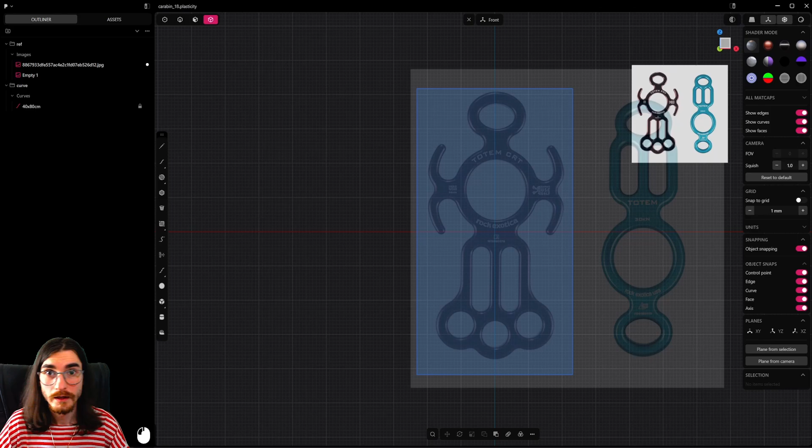Hello friends, today we're going to make this tricky little shape. Let's start from size - it's like 40 by 80 centimeters.

Let's start from the central one, make it like this. What's next? Good question.

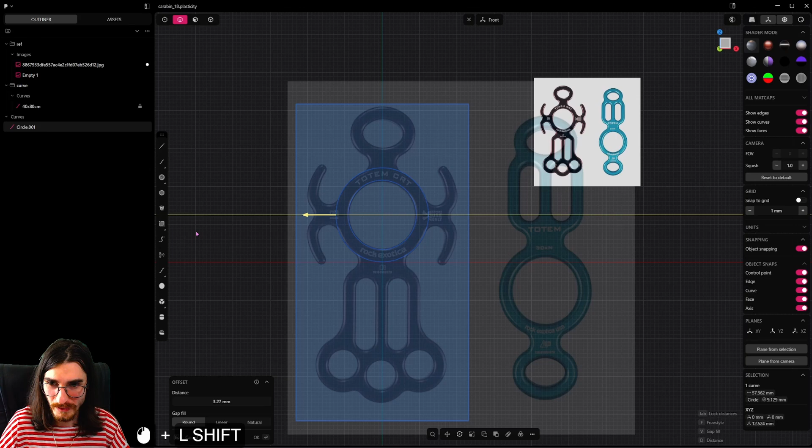Offset, of course. We are doing the offset and making it like this, this part here. Move it over here a little bit.

Yes, I think we should offset it first, and second we should move it. Shift D and move it to the center, somewhere here. Now we need this ellipse.

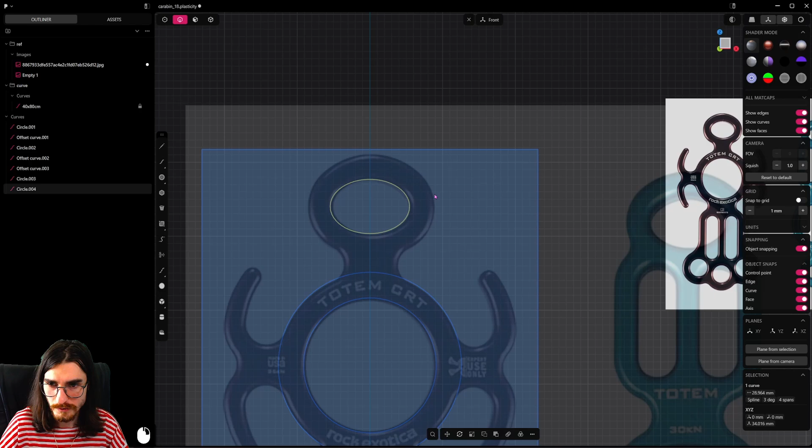The same offset here, and we need these tricksters here. Let's create one here.

This is going to be our first one, 2.794. Yeah, let's do another one here.

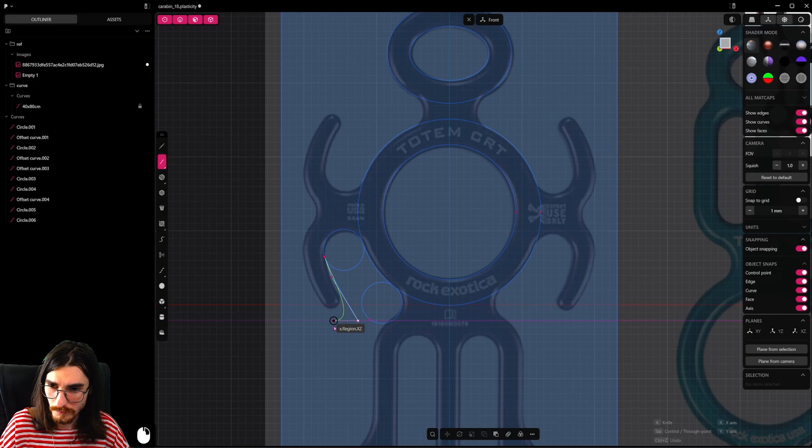Drop it like this. And these guys are going not in the same direction. Let me just show you a little - switch to control points. Good, and let me move this one here.

SV, put it here and make it smaller. Yeah, I think this one is 5 point blah blah blah. Okay, let's do it over here.

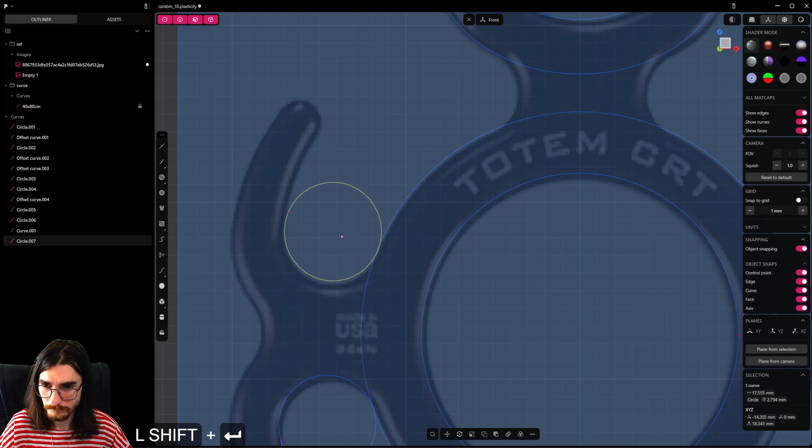F, dimension 5.588. Oh, so that's what's wrong.

GV, can I get it here and can I snap it? Yes, I can. And here is the same problem, I guess. Yes.

GV, let me snap it here, Y axis, and let's snap it to this thing. It should be a 3-point circle. Let's try 1, 2, and let's do a third one here.

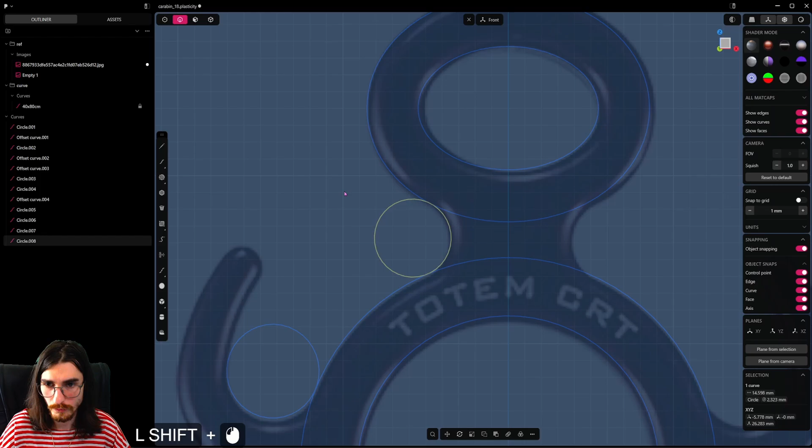Good, so what's next? You will ask me and I'll tell you. We are going to do this thing, make it something like 3 millimeters.

Perfect. I need to do it over here, and I need to do that on the center line over here. And now I can try - yes, I can do that.

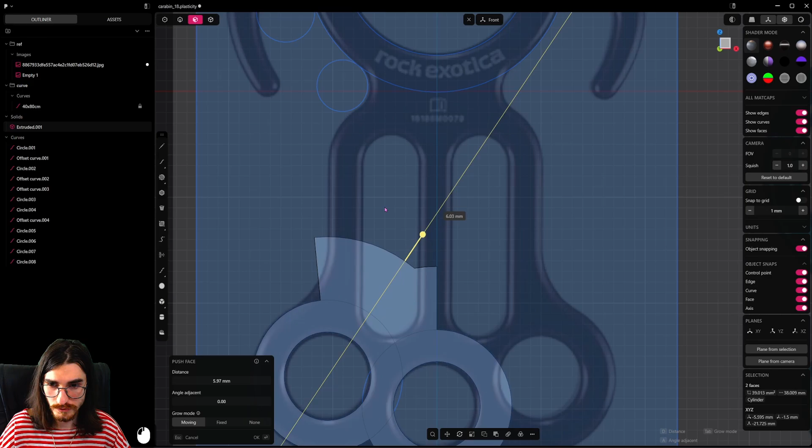Let me just rise it somewhere here, and let's do C, cut, apply X, and let's adjust it just a little bit, move it over here to match this.

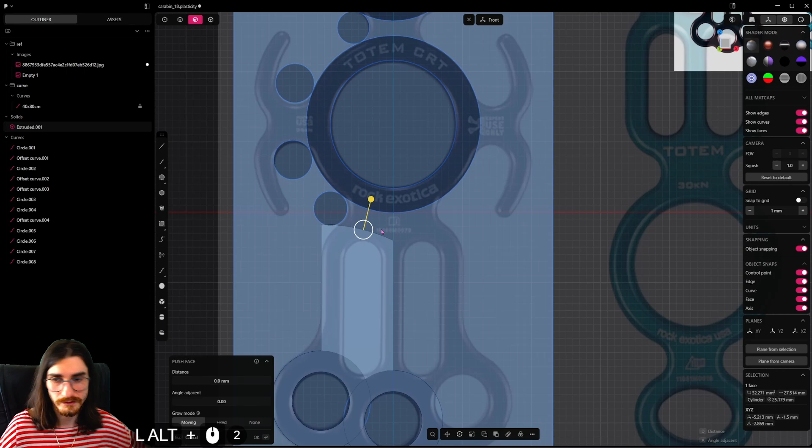Let's continue our journey over here. So I need this part and I need it to be flat. Let's do the same trick with this thing.

C, X, perfect. And let's drop it to the top, maybe like this. And I also need to drop some here, I think, yes, and drop it somewhere here.

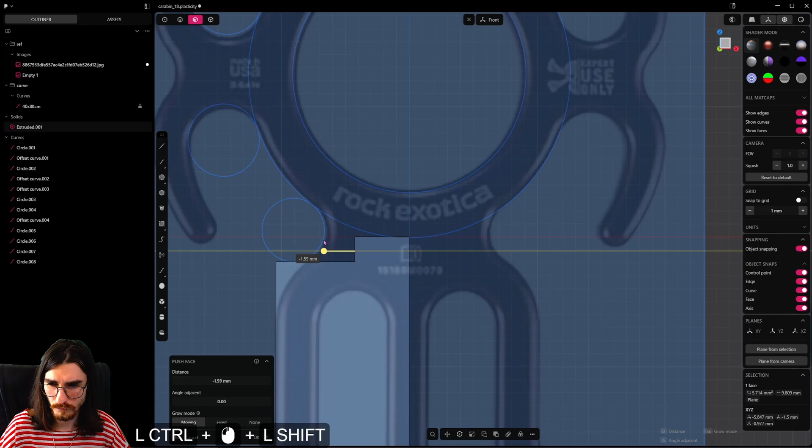I think somewhere over here. Make this one and match it. F, match face with this thing.

And I also want to match face with this bad boy. Yeah, let me just create this stuff here. And let me select this, and do F, match face, and select this.

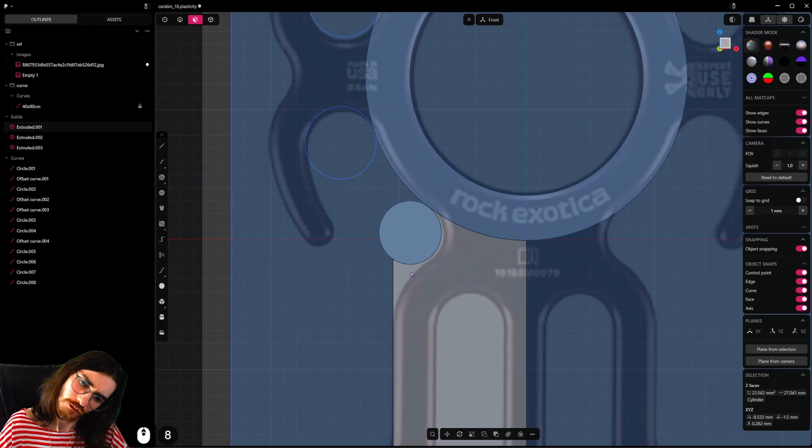The only thing I don't like is that it's made it with this. Can I just - yes I can. Perfect, perfection, love it. I think I can merge.

It's not a big deal here, it won't be a big mess if I do it. Okay, and let's do Alt X on this side, Q, merge it, and let's take this.

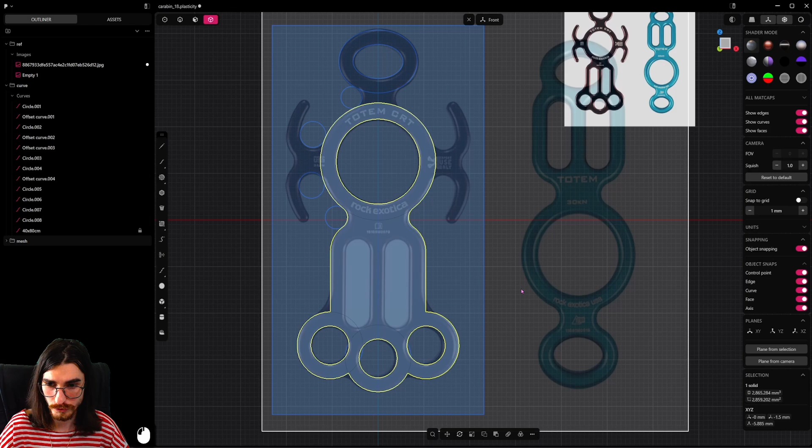I think definitely we should do extrude and extrude it here. Just Q, merge it, and let's also cut this one like that. C, boom boom, X, just to have this nice circle here.

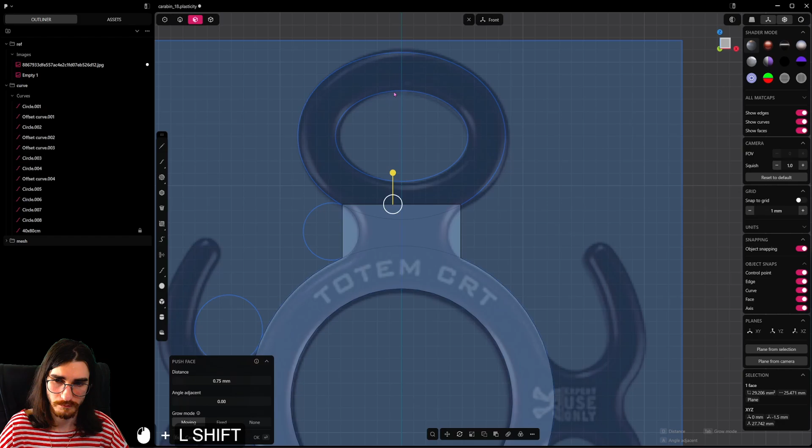Yep, I think something like this. Let's drop this guy on the same level, and this is our guide. We want to do this thing.

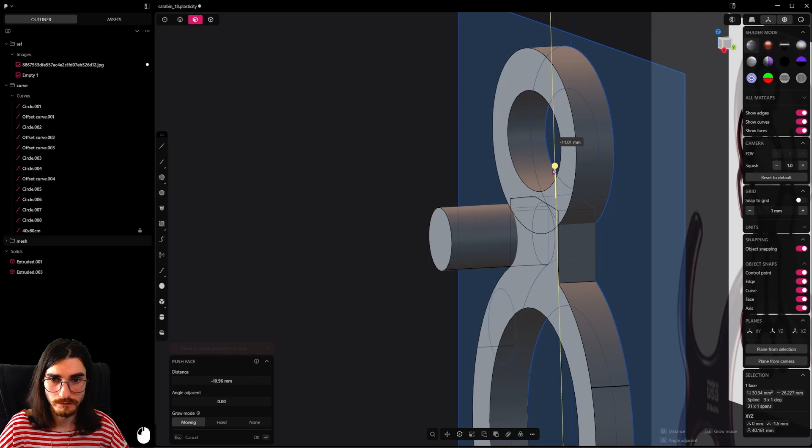Let me just drop it to the ground, Alt H, and let's F, match. What? What's wrong with that? Too much, I think - what's wrong with that?

It's just because, yeah, I need to cut it a little bit over here and here. Let's just Alt X it to this side, merge it, and now it should work.

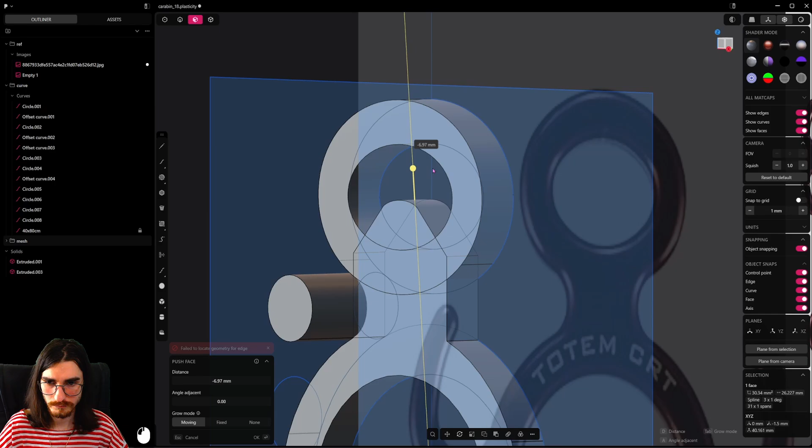F, match, and select it. No, for some reason it makes it too big. Not sure why. Okay, let's apply it, and let's just take this.

Now what - I can hide this guy, I can take this thing, I can do a C, cut, apply, and I need this for some reason, and I will delete this just like that.

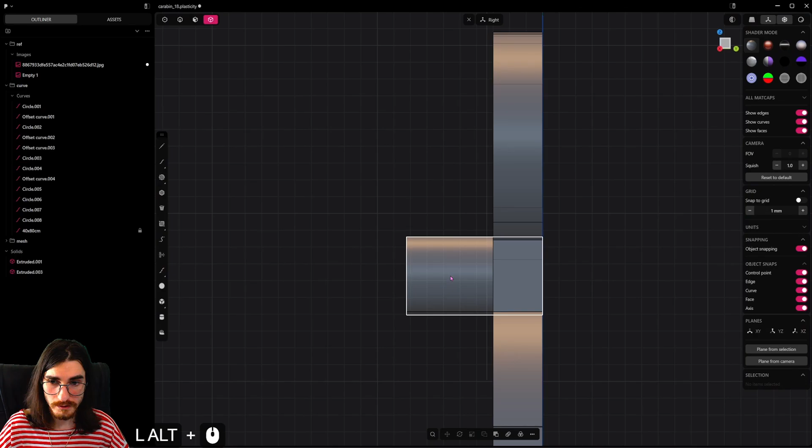Alt H, good. And now I can boolean it, or I can try to match face it. Why not? Let's try to match face.

Okay, Alt H, F, match face, and select this. Good, this one worked. Sometimes it doesn't work, it's not a big deal. We always have our booleans. If it doesn't work, boolean it. It will do the magic.

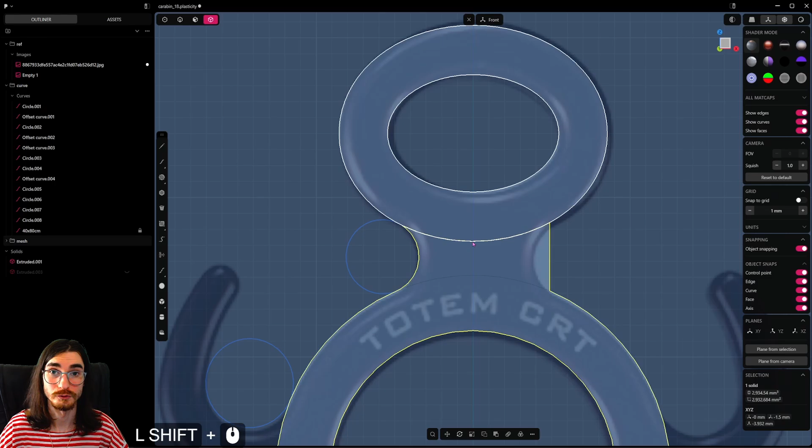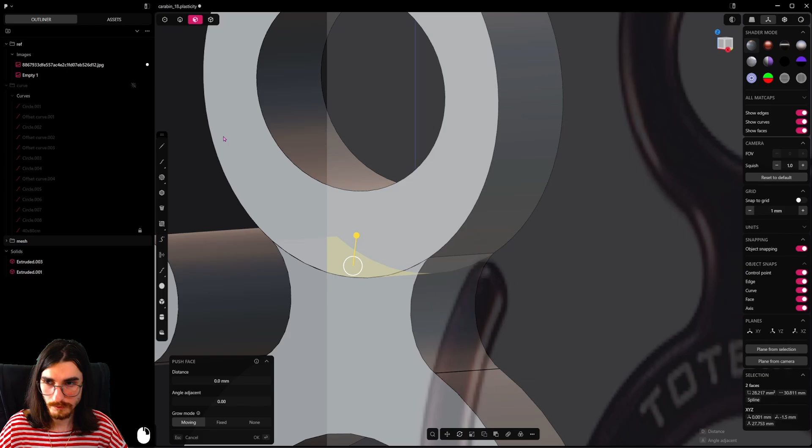Let's see, why can't I merge it. Let's do Alt, Q, merge it. Let me just quickly try something, move it over here. Let me do Alt H, F, match face, and drop it here. Maybe now it will work. Yes, okay, so sometimes it can just give you nuts.

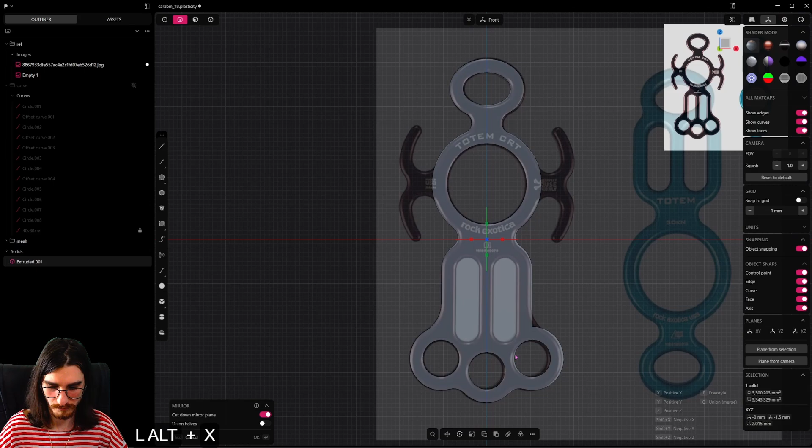So to finish this octopus, let's drive—I don't know, I think it's an octopus, it reminds me of an octopus. Let's just make this one like this. Yes, these guys should be something like this. Actually, I forgot, F, redundant topology.

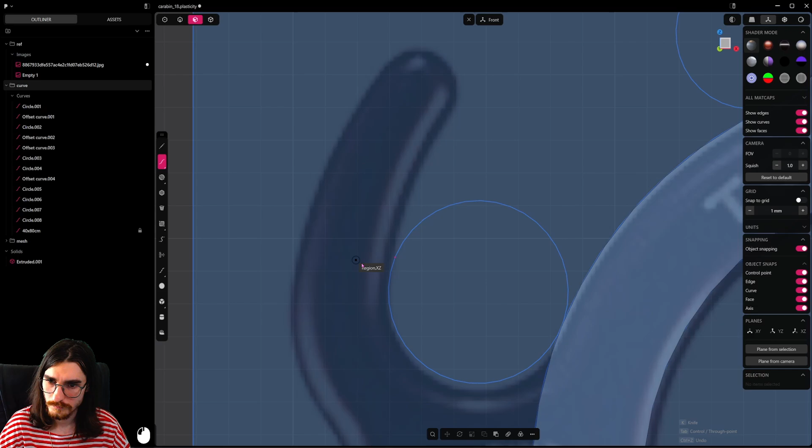Let's just drop it here, and let's do the same over here. Press E and extrude, that's pretty good. First thing first, let's cut this guy down. See, cut it, let's make it a little bit bigger, like this. I need it somewhere here. Yes, yes, something like this should work.

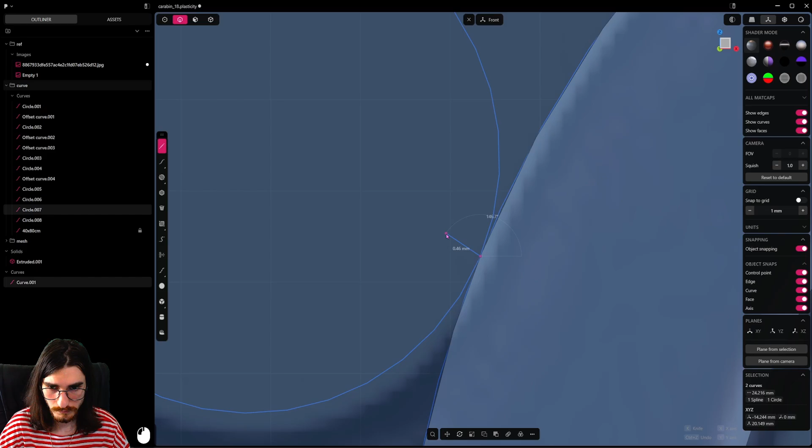Okay, let me select it, Shift C. Good. And let's do the same thing here to cut it like this. Shift C. Good. X. Join it. Okay, let's just make it like this.

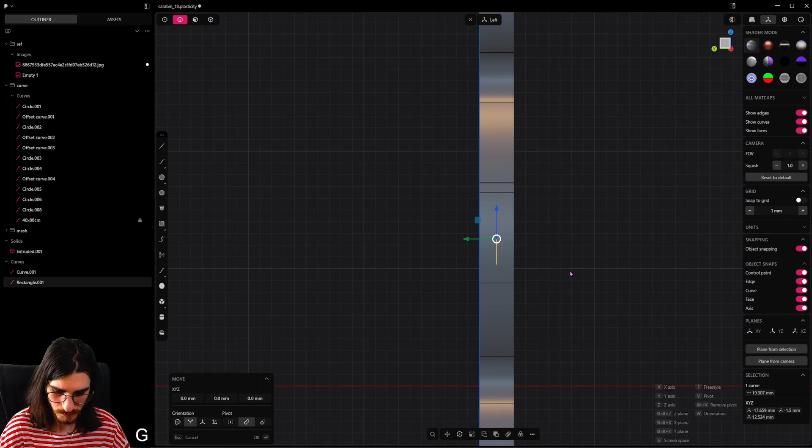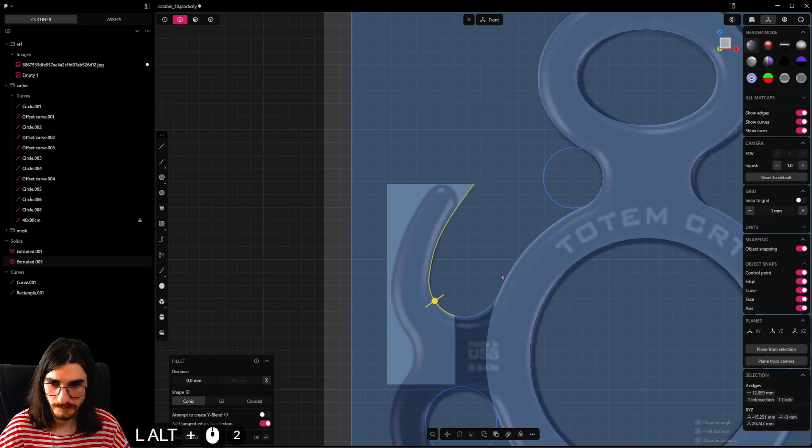Move it here and match it with the center. Get a little bit smaller. Give me that one, and let's put it here, over here. And now let's make this. F, match face. Yeah, that worked. F, match face, good. Let's create the offset out of this one. We need to make it somewhere here. F, complete edge. Perfect, very good instrument.

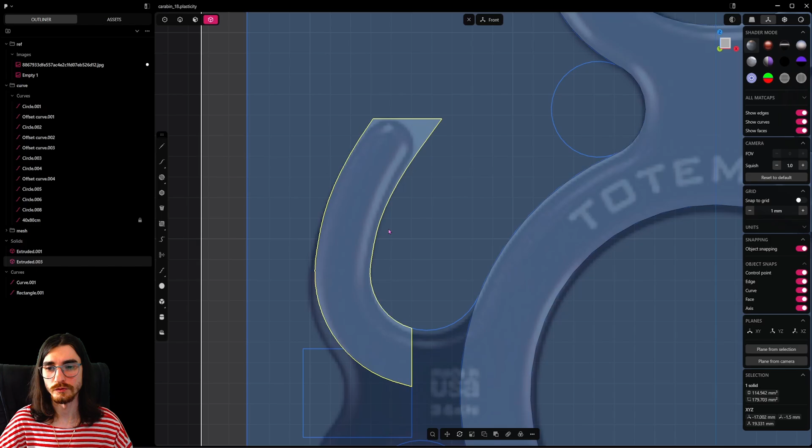Okay, let's Shift X this thing and let's Shift J this. And let's F, redundant topology. A little bit chubby here, we can try to redo it, just a little bit smoother. Isolate it, let's try to rebuild it. Think maybe like this, yes.

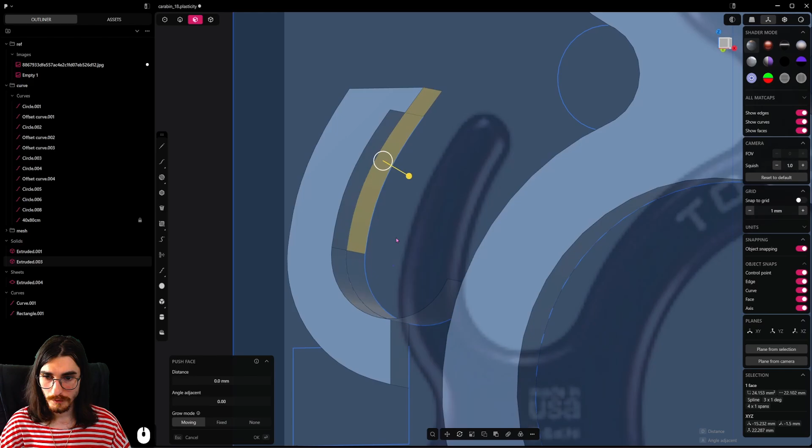Yeah, I think it already looks better, let's try it. Just drop it here, F, match here. That one also a little bit lower. F, match, and select this one. Offset this one, and let's drop it somewhere here.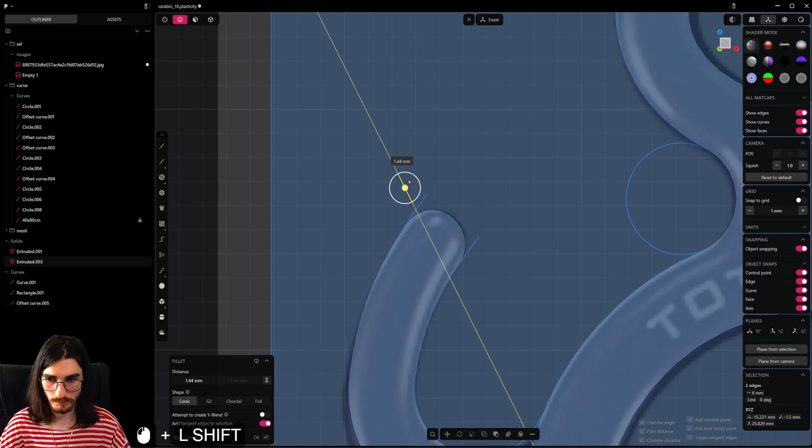And let's make this, and let's do the same thing. Just select this thing, F, match face, and select this one. Good, or maybe I just can do this. That's good, let's just bevel these things too. Can I do a full? Yeah, perfect. Okay, so what's next?

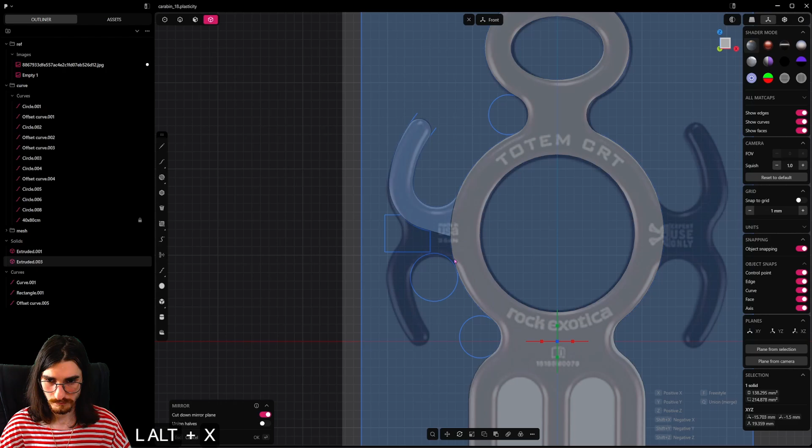Next, I definitely need to drop this thing over here, and it will follow it perfectly. Nice, love it. Can I match it actually? F, match face, and drop it here. Now I need to Alt X, make a free one, and drop it here, Q, Q. And if we are lucky enough, let's try to do this.

Yes, we are lucky enough. Let's select this, Q, Q, merge them, Alt X to the other side. And let's also cut these pretty bad boys. Now I actually think it's something like this. Center point arc, yes, like boom, boom, boom.

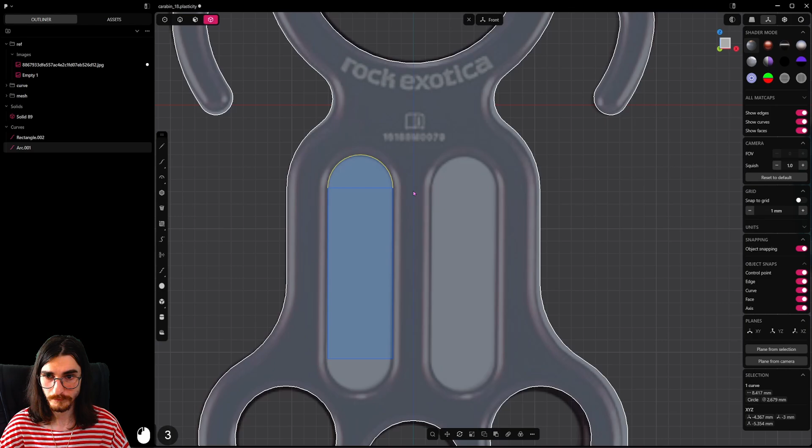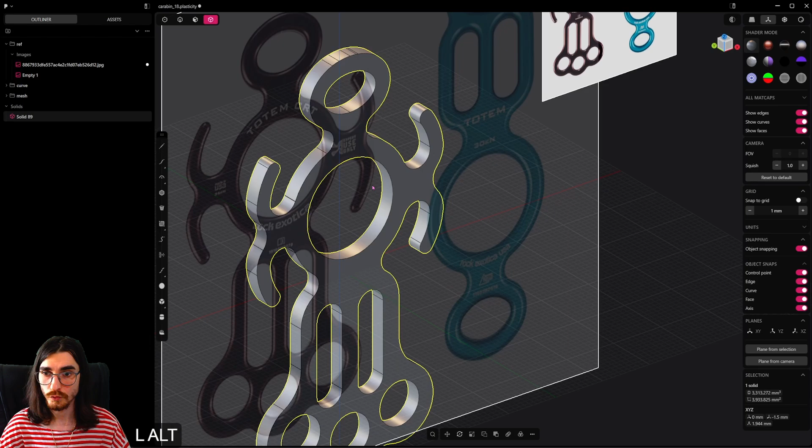And let me Alt X, free here. Oh, just like this. Good. And let's just Boolean it out. Okay, select this, Q, apply, Alt X, left side, Q, merge. And the last thing, but not the least, we need to bevel it out. Move it to the center, absolute center, good. F, redundant topology, let's try to make this.

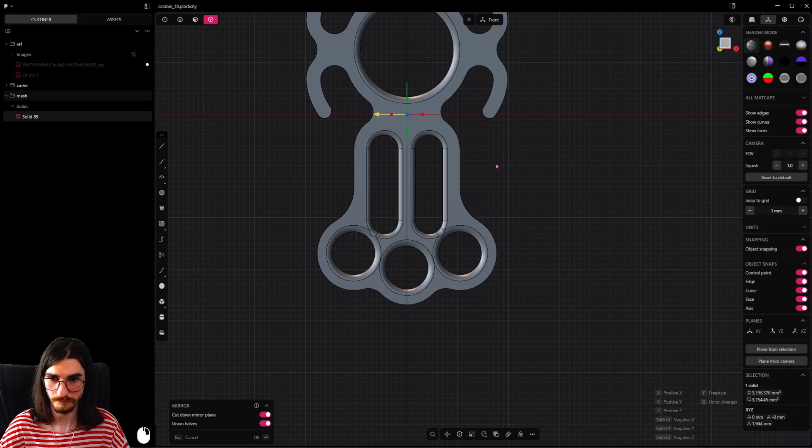Okay, good, so this two should be like this, and this should be like this. Let's Alt X to the left side, and let's do this outer one, the big one. Conic, let's do this conic. Good, let's leave it like that.

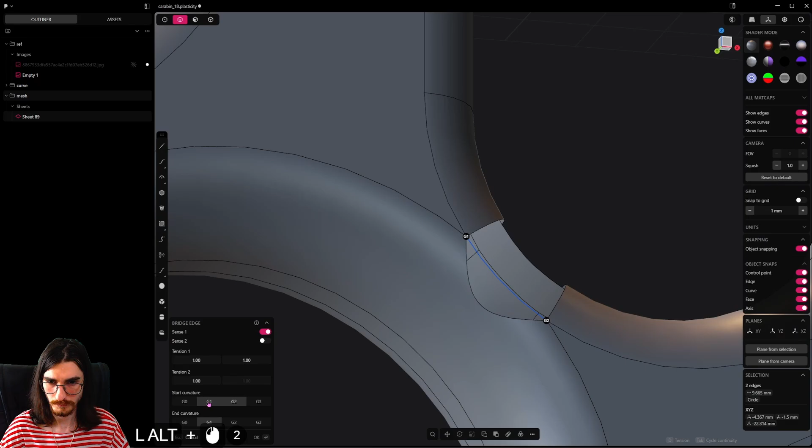Shift X this thing, I will select this and do Shift B, bridge it. And I'm not sure that it should be G2, let's keep the G1, let's do loft. And let's take this and this as the guides. Good, now let's join it together. Good, let's delete this curve.

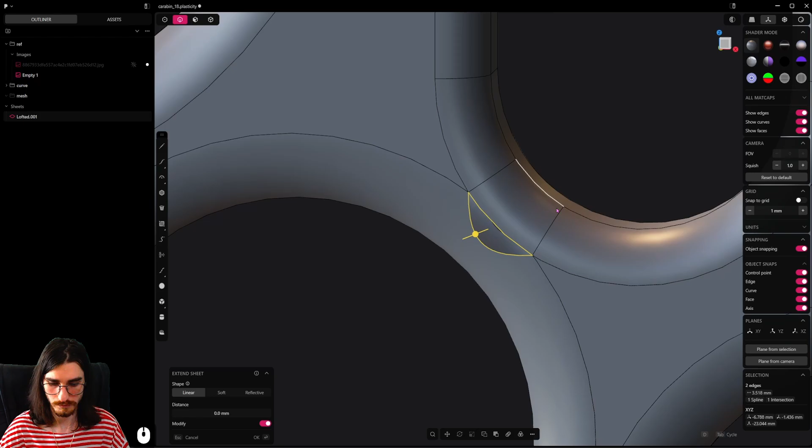Let's select this thing here, and let's just Shift J it. G1, G1, not just like this one little thing. Let's just try it, let's just give it a kiss. Control R, like this, yeah. Shift X, let's try to merge them. Just, yeah, like this. And Shift J.

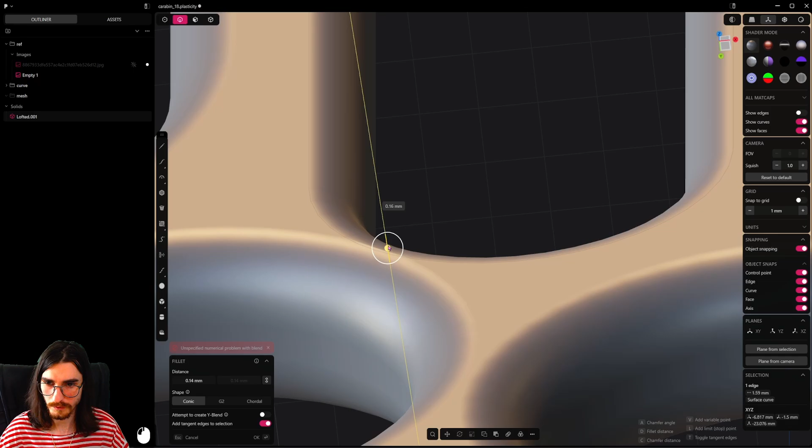One of the best, Shift J. Can I do G1 here? Nope, nope. G0, G1, G1, G1. Let's try this, yeah, this one is good. I like this one, maybe I can just make this little thing there.

Good, Alt X, Alt X, from here to here, Q. And let's Alt X it to the backside too. F, redundant topology, deleted. Nice, perfect. Let me see it in this crazy mode. Ugh, my head is aching when I see this type of shit.

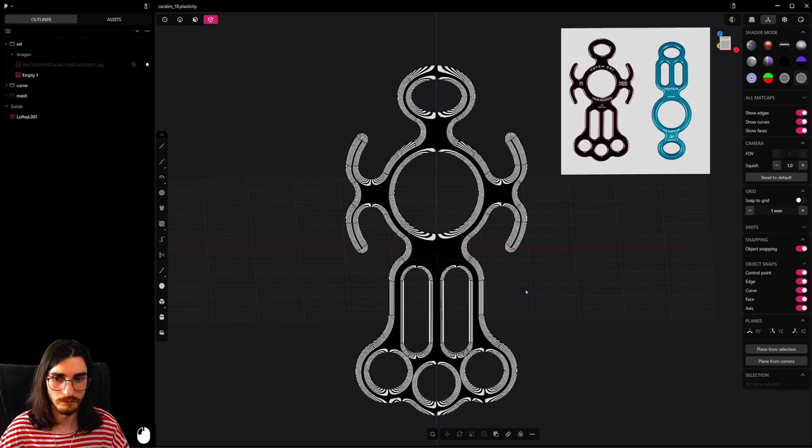This was another crazy little shape. I hope you've done something much better than I. Stay healthy, stay tuned to the new videos, create new cool shapes, and I will see you in the next one. Bye!